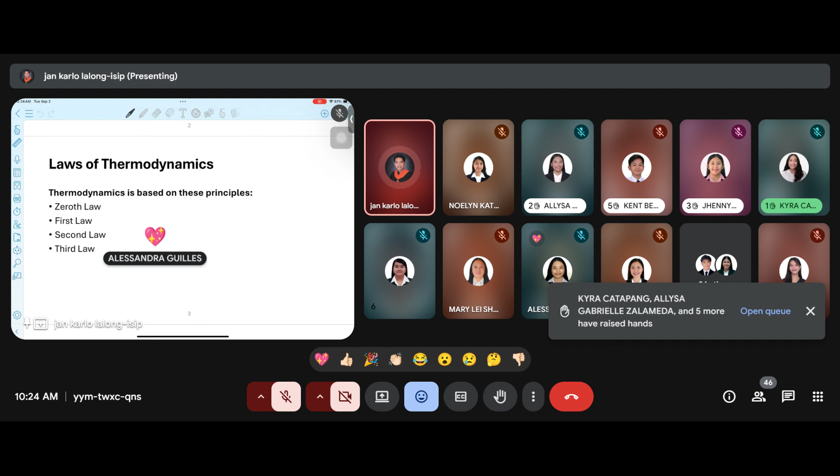Sir, second law. The second law states that the entropy of the entire universe as an isolated system will always increase over time. So that's the simple explanation of our second law of thermodynamics. Our entropy of the universe always increases.

So what is the universe we're talking about? That is the surrounding. So our second law says that we don't have an engine that is 100% efficient. We have an element of entropy, or what we call the disorder in the system. The second law states that there is no such engine with 100% efficiency. There are always losses, as we call them.

Okay, thank you, Alimagno. And then let's have the third law of thermodynamics. Let's have Barrion.

The third law of thermodynamics is: entropy of a system approaches a constant as temperature approaches absolute zero. Okay, so that is correct. As our temperature approaches zero, our entropy also approaches zero.

Okay, thank you. You should always remember those laws of thermodynamics, especially in analyzing problems related to thermodynamics. And we all know that combustion engineering is very related to thermodynamics.

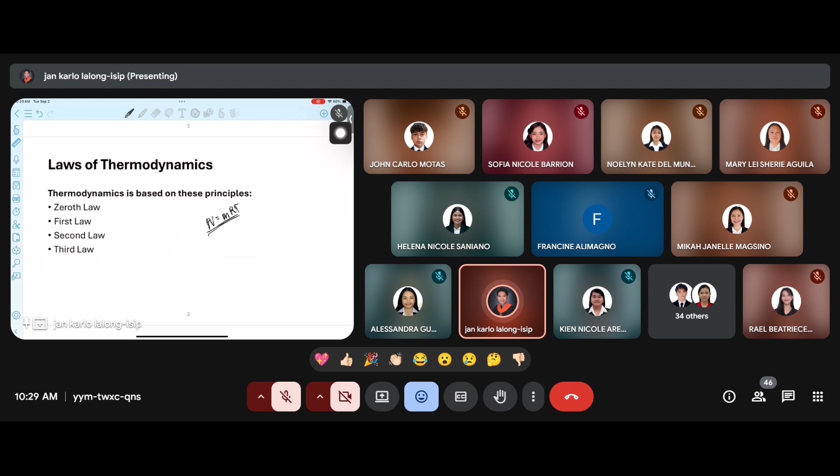Okay, so we have the basic values that we use. Let's refresh this because I know it's easy to forget after different subjects since we study a lot. So we have this formula PV=MRT wherein our R is the universal gas constant.

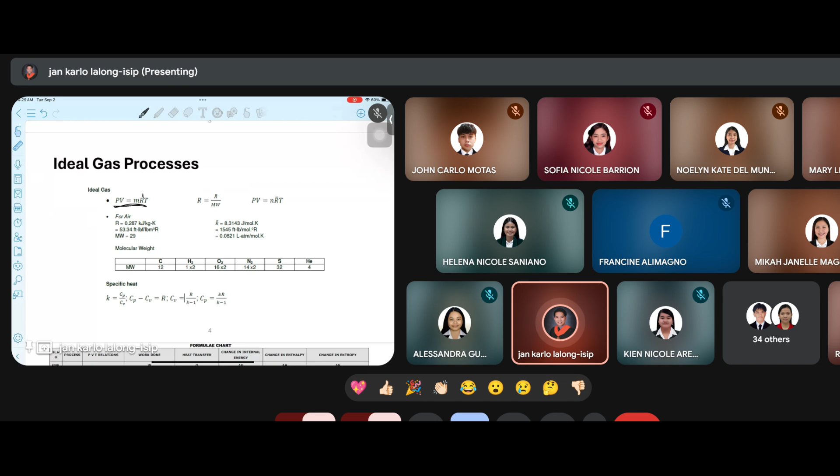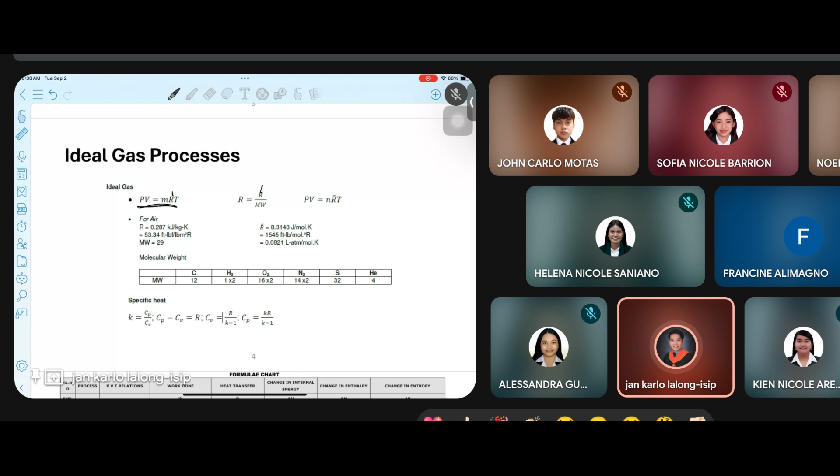But if we are given a specific element to use with our process, that R, the universal gas constant itself, equals 8.3143 joules mole per Kelvin, over our molecular weight, depending on the molecular weight used by the system, whatever element we're using with the system.

Okay, so for air, since this is most commonly used in our Thermo 1, we have the R value of 0.287 kilojoules per kilogram Kelvin, which also equals 53.34 pound-force over pound-mass degree Rankine. And the molecular weight of air is said to be 29.

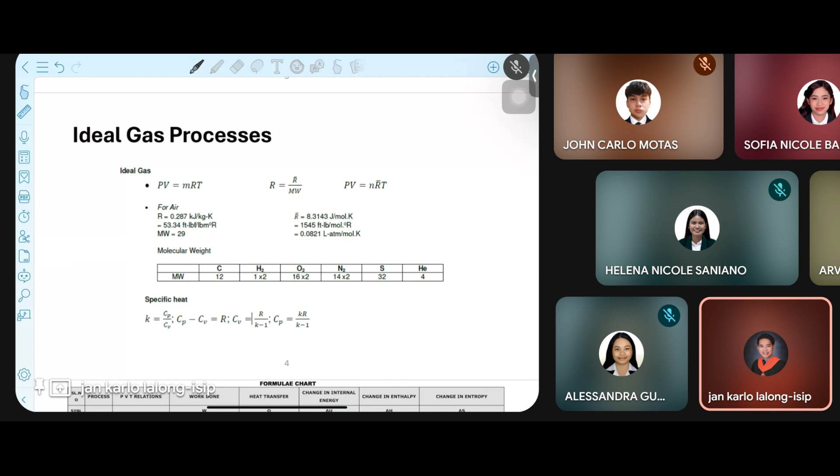Okay, so let's have these 7 general equations. So familiar pa naman. Alam pa naman siya kung paano gamitin. So mostly ng students is sinasaulo yung ating mga equations. But then we should just learn kung paano titingnan yung pattern niya. May pattern kasi siya which will result for us to easily understand yung kanyang mga formula.

So let's have yung ating mga PVT relations or the pressure, volume, and temperature. Okay, so if our process is constant volume or isochoric, meaning our volume nga is constant, so di ba we have the formula of PV is equals to MRT. Okay, so if we have the same equal volume or constant yung magiging volume natin, so for state 1, we have P1V equals MRT1, and then we have P2V equals MRT2.

Okay, so if we have a constant volume, meaning we have volume is equals to MRT1 over P1 and also MRT2 over P2. And then we can also already cancel yung MR kasi that is just the same values naman. So meaning our T1 over P1 is equals to our T2 over P2. Okay, so just rearrange yung ating formula para maging T1 over T2 is equals to P1 over P2. Okay, so yun lang. Hindi nyo na siya kailangang sauluhin. You just need to learn kung ano yung concept niya.

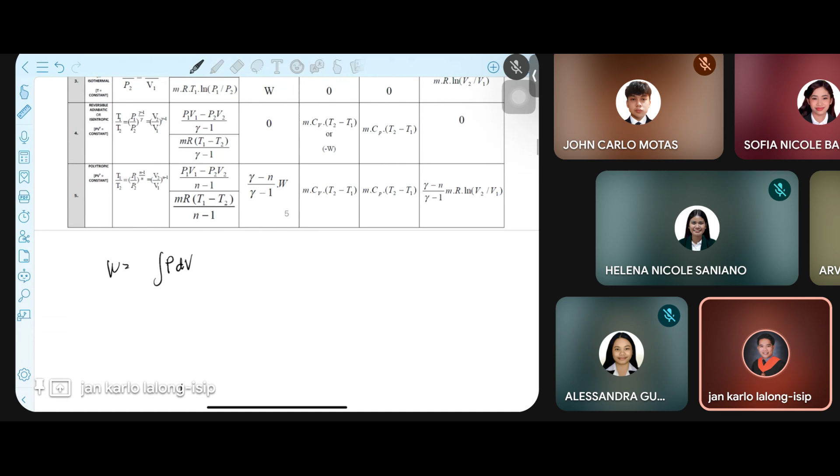Okay, so ito naman, we have the work naman. That is just simply yung ating ginagamit na formula na PDV. Our work is equals to PDV. Ayan. So, syempre, pag constant volume, that is already 0. So, also, yung ating internal energy, that is just this formula, MCV delta T. And then, change in enthalpy, that is MCP delta T. So, bakit nag-0 dito? We have isothermal. So, meaning, wala tayong change ng temperature, meaning that will be 0.

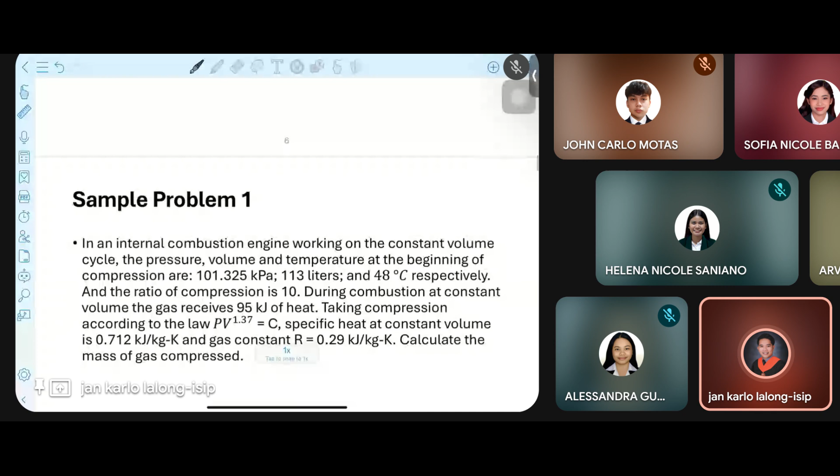Okay, so this is just the review naman. So you should know yung ating mga formulas na ito before we proceed with our different discussions ng ating combustion engineering. Okay, so I want you to have the sample problem. How are we going to answer? This is not yet a combustion problem, but then it is a basic thermodynamic problem regarding the states of a combustion engine. Okay, so let's have here an internal combustion engine working on the constant volume cycle.

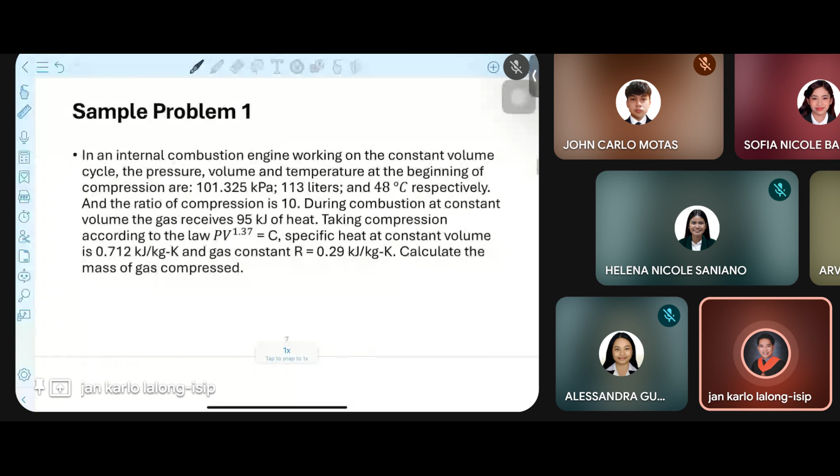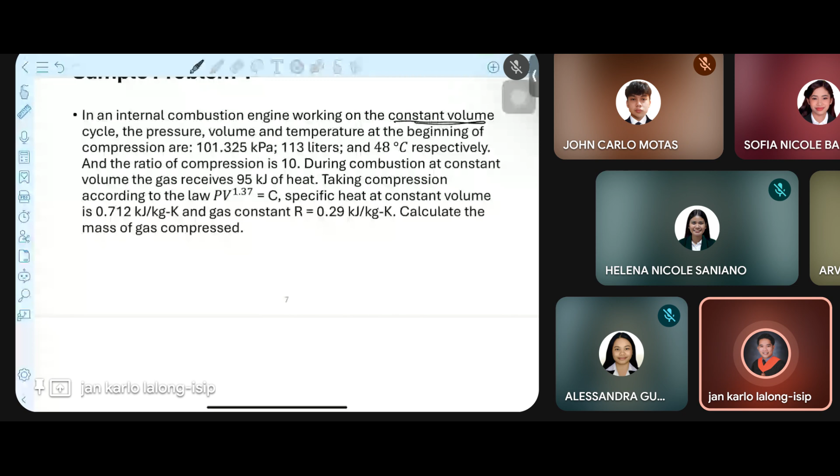So sinabi that we have a constant volume cycle. The pressure, volume, and temperature at the beginning of the compression are 101.325 kPa. Okay, so again, when we are going to solve problems, una nating isusulat muna is the given. So you should always have yung ating mga given or our known values. So sabi dito, the internal combustion engine working in the constant volume cycle, the pressure, volume, and temperature at the beginning of the compression. So that is our state point 1.

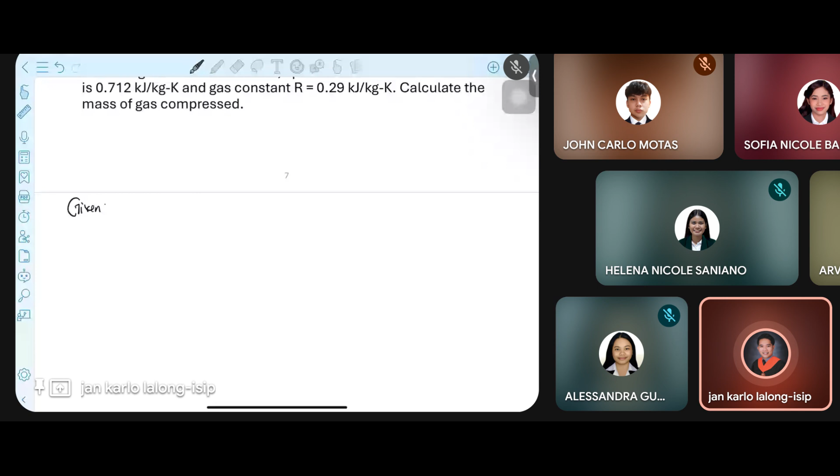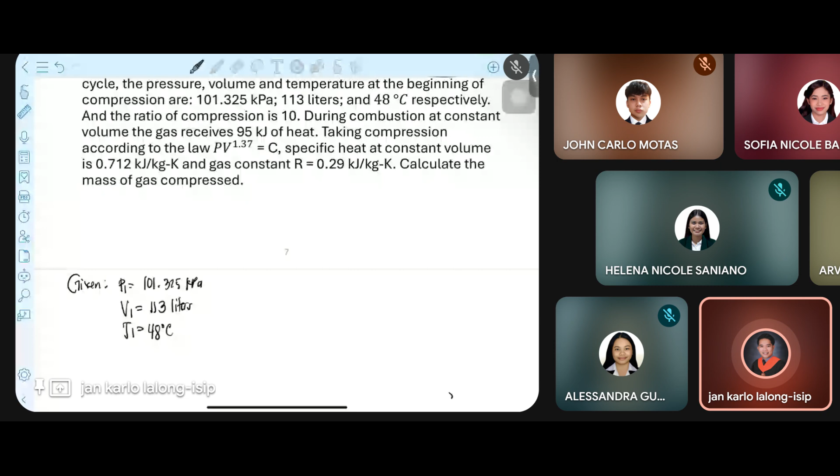We have our P1, pressure 1, to be 101.325 kPa, and then we have our volume 1 to be 113 liters, and then our temperature is equals to 48 degrees Celsius. So constant volume, meaning our V1 is equals to our V2. And then the ratio of compression is 10. So we have a compression ratio of 10. So ano yung symbol natin for compression ratio? That is RK. That is 10.

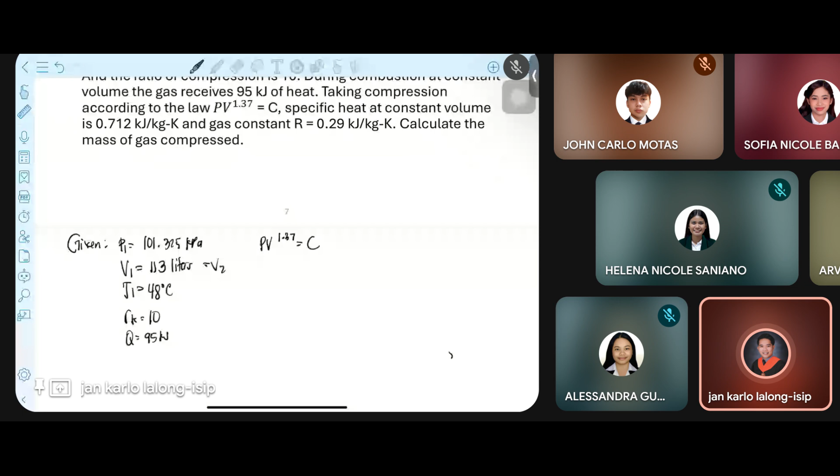And then during combustion at constant volume, the gas received 95 kilojoules of heat. So we have heat of 95 kilojoules. Taking compression according to the law of PV raised to 1.37 is equals to C. So, ano yung makukuha nating value in this equation? Ano yung value natin na 1.37? Anybody? Okay, De Los Santos? Ano yun? Ay, yung N ko pala.

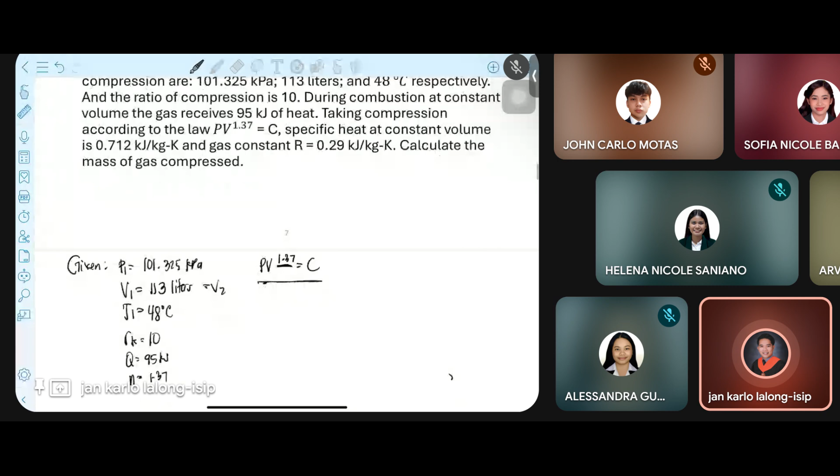Okay, so that is our N equals to 1.37. So in some cases, that is also the K na tinatawag natin. Okay, so next, ano pa yung ating given? We have the constant specific heat at constant volume, so we have the specific heat of 0.712 kilojoules per kilogram Kelvin. And then our gas constant na 0.29 kilojoules per kilogram Kelvin.

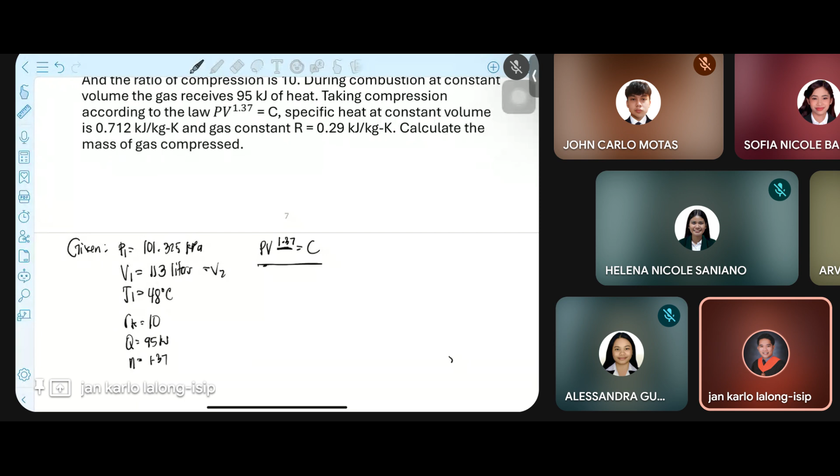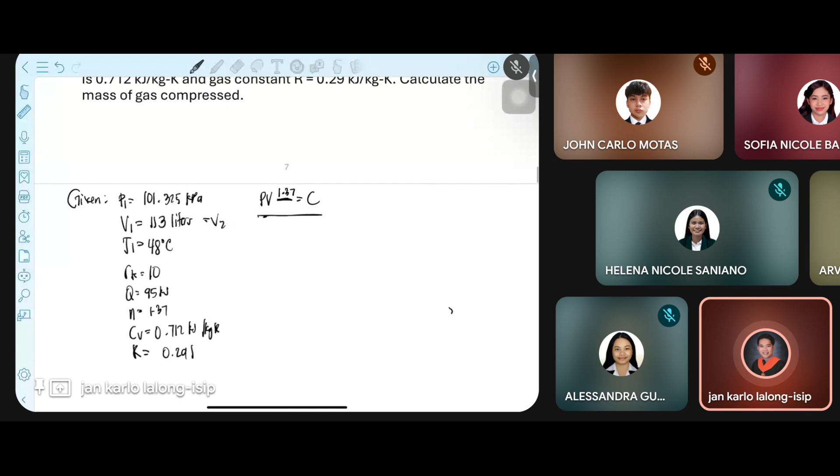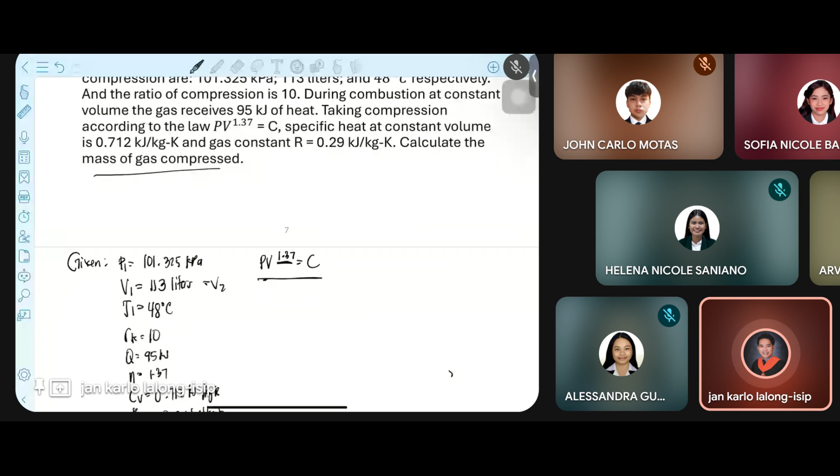So that is our CV, 0.712 kilojoules per kilogram Kelvin. And then our gas constant is equals to 0.29 kilojoules per kilogram Kelvin. Okay, so ang hinahanap natin dito, or we have the required, yung required natin is the mass of the gas compressed. So meaning we are looking for M. Okay, so ang dami pa nung given natin, but then we are only looking for one value, which is our mass of the gas compressed.

So our solution, ang dami natin given, but then we are only looking for M. So we can simply get that using what formula with this given. We have, ano yung gagamitin natin formula? PV = mRT. Okay, so we have PV = mRT. Okay, so with that, kayang-kaya na natin kunin yan with only pressure, volume, we have also the R and the temperature. So what would be the value ng ating mass of the gas compressed?

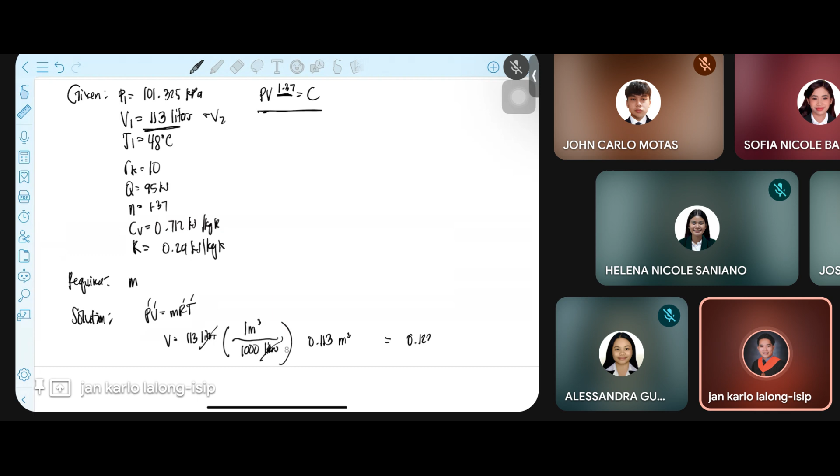So how are we going to convert that? So we have 113 liters. So, una muna, our volume, that is 113 liters. Conversion, anong conversion natin ng liters to meter cube? HN. Nandito ba si HN? Okay, so simply yung ating conversion is 1 meter cube is 1,000 liters. So cancel, we have 0.113 meter cube. And direct substitution, makukuha na natin yung answer which is 0.123 kilogram. Okay, so just a review lang naman to ng ating mga thermodynamic problems. Okay, so let's have another problem.

Let's have here the compression ratio of a petrol engine working on a constant volume cycle is 8.5. So the pressure and temperature at the beginning of compression are 101.325 kPa and 40 degrees Celsius. And the maximum pressure of the cycle is 3,141.08 kPa. Taking the compression to follow the law of PV raised to 1.35 is equals to constant. So we are going to calculate yung ating temperature at the end of compression.

Okay, so this will be your task for today, which will be recorded as your attendance. So, yung attendance natin is the index card, and then to validate yung attendance, you are going to submit yung sagot ng ating problem 2 at the end ng ating meeting. Okay, so we have until 11:30 naman for today. So you can solve that in any paper that you have. Isasubmit nyo lang yung sagot nyo in our Google Classroom. So I will be assigning yung pagpapasahan nyo sa Google Classroom. Okay, paki-screenshot nung ating tanong. Okay na ba? Na-screenshot na? Okay, so that will be your task until the end of our class.

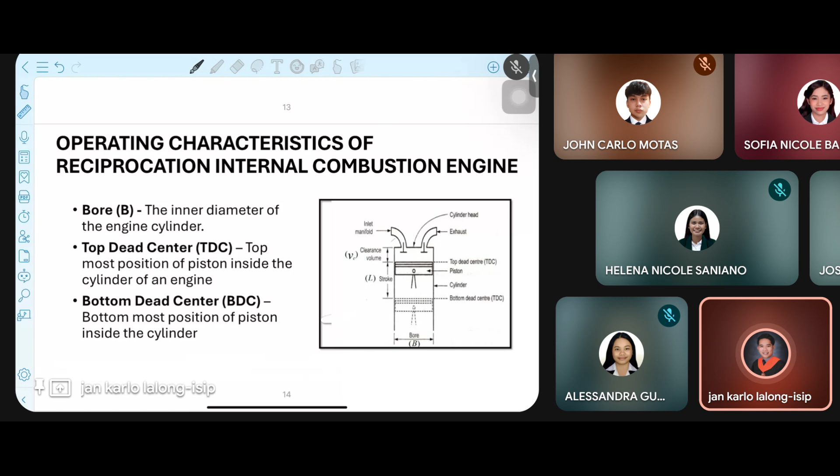So tomorrow we are going to have naman yung ating operating characteristic of reciprocating internal combustion engine. So we are going to continue with the parts ng ating internal combustion engine so that we can apply those thermodynamic fundamentals into the internal combustion engine. But for now, let's focus first on this review question.

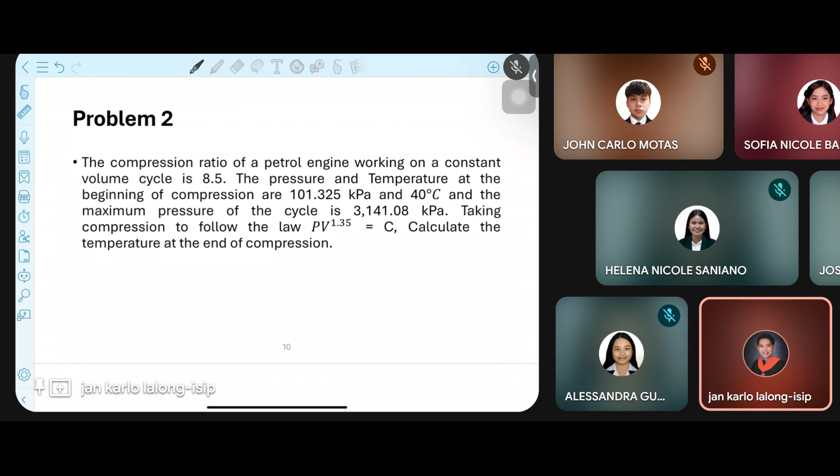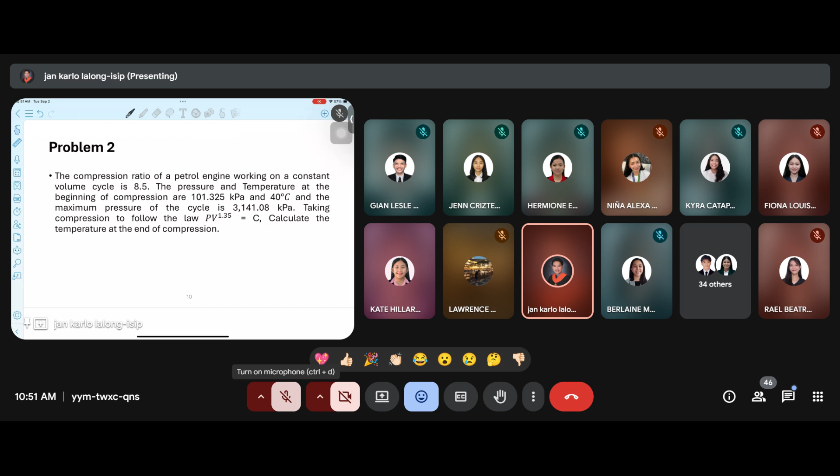Okay, so let's have muna yung remaining attendance natin. HN, nandito ba? Arcelias. Present po. Dimaandal. Present po, sir. Salazar. Present po. Arabia. Rojas. Present po. Sumadsad. Present po. Cruzat. Present po. Villena Jerome. Present po. Generoso. Present po. Perez Kent Benedict. Present po. Espinili. Present po. Cocosa, Alcantara, Anakan, Katapang, Olave, Mercado, Pita, Hernandez, Delen, Aliali, Dehan, Buwan, Arpia, Hermoso, Magsino, Perez, Zalameda, De Los Santos, Patulot, Alamano, Sarabia. Present po. So, may hindi ba natawag? I will just take note of that. Present naman lahat nung may index card.